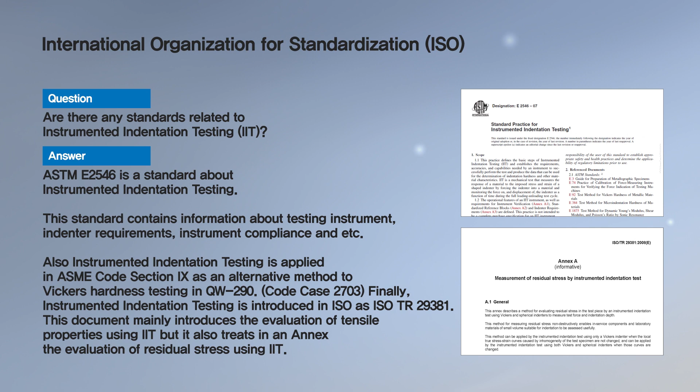With this video demonstration, we would like to give you a brief introduction about IIT and basic principles of equipment setup and operation by showing you some video clips.

Unlike conventional hardness test, IIT measures penetrated depth and applied load during loading and unloading operation, and it is the technology of getting a continuous curve of load and depth to get versatile properties precisely in a non-destructive method.

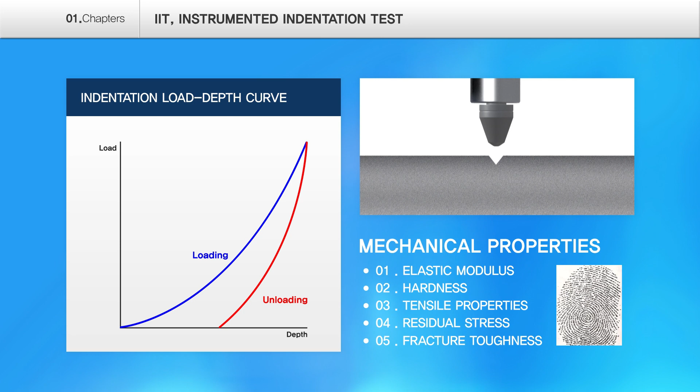Load depth curve from IIT represents the uniqueness of each material, like the fingerprint of a human. We can get diverse mechanical properties, such as hardness, strength, and toughness, from this LD curve in a simple, smart, and selective way.

Next is about the introduction of measurement for residual stress with IIT.

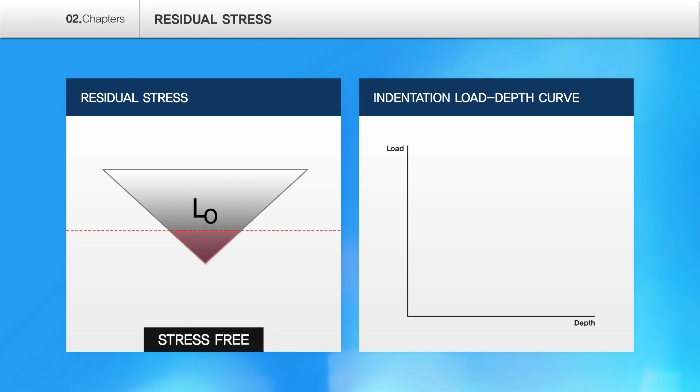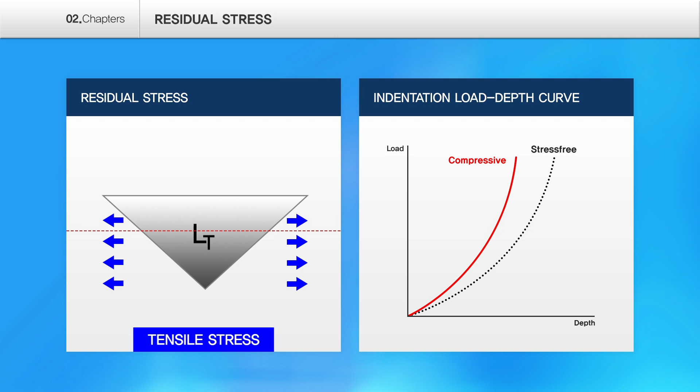The aforementioned load depth curve is different also based on the residual stress state of the specimen. If we assume that the curve being created now as a loading curve represents a stress-free state, and if the material is being indented in a condition of tensile stress state, being pulled to both sides, then the maximum indented depth would be increased. This means less load is needed to get the same indentation depth.

On the contrary, if the same material but under compressive stress from the sides is being indented, its maximum indented depth is reduced with the same load applied, which means higher load is needed to reach the same indentation depth.

The technology of IIT is to evaluate the value and direction of residual stress non-destructively from the load difference between stressed state and stress-free state that occurred during these processes. The next is about conversion of residual stress and load difference to tensor.

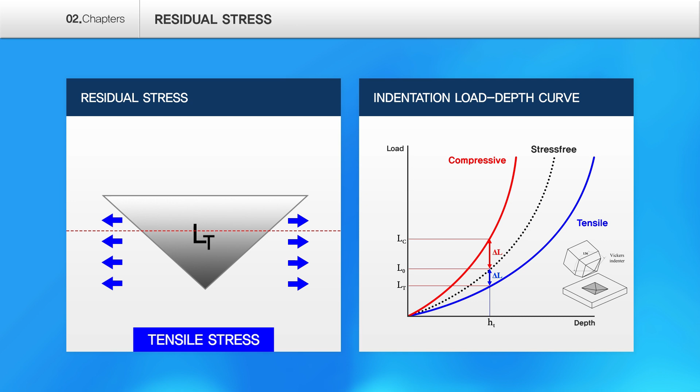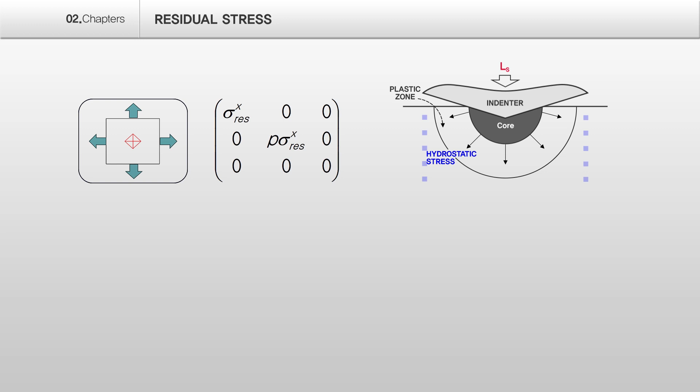When residual stress is distributed in x-y direction on the surface, if we put the ratio of these two stresses as P, it could be expressed as the following tensor.

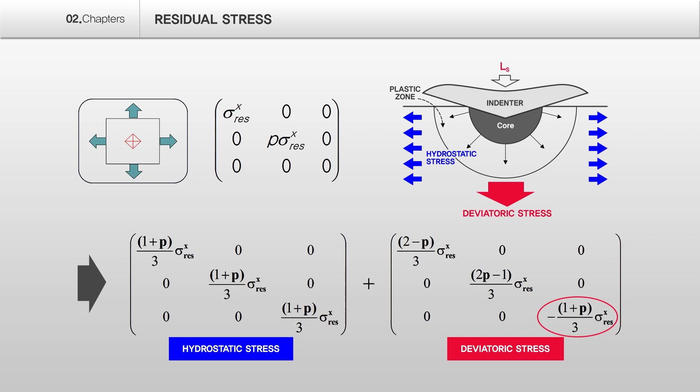It gets the stress element causing load difference from deviatoric stress, excluding hydrostatic stress, which affects only the elastic volume change. It can get the value of residual stress and direction because the converted stress value from the difference between this stress and load are the same.

Next, I would like to show you actual field application of AIS 3000 Compact based on this algorithm.

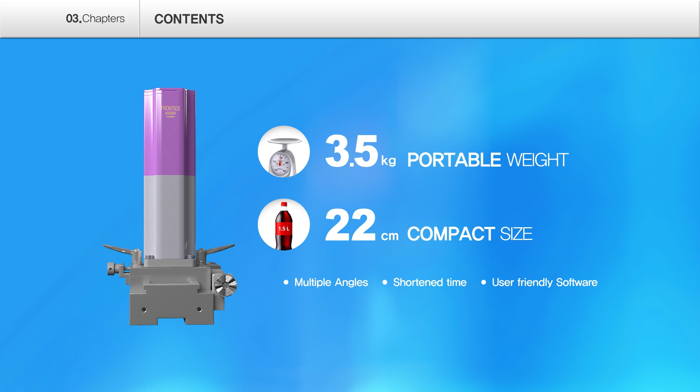AIS 3000 Compact equipment weighs 3.5 kilograms with 22 centimeters length. It is similar to the size of a 1.5-liter cola bottle, and it has different attachments to conduct testing on-site easily with application to tested objects.

In addition to the residual stress in basic software of AIS 3000 Compact, programs that calculate the yield strength, tensile strength, hardness, and fracture toughness are available, and it is being utilized in many different fields.

Now I would like to show you about the field application for the testing of the residual stress. The test procedure is like this.

First, we should choose the most suitable attachment according to the shape of the target object. In this video, it is using a fillet jig as attachment to the tested pipe.

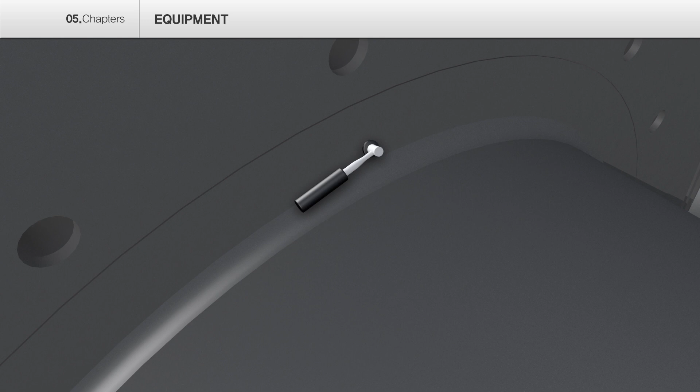At first, we prepare a stress-free state specimen. After checking the testing surface, fix the IIT instrument to the tested target with using proper attachment, and move the indenter down to implement the testing.

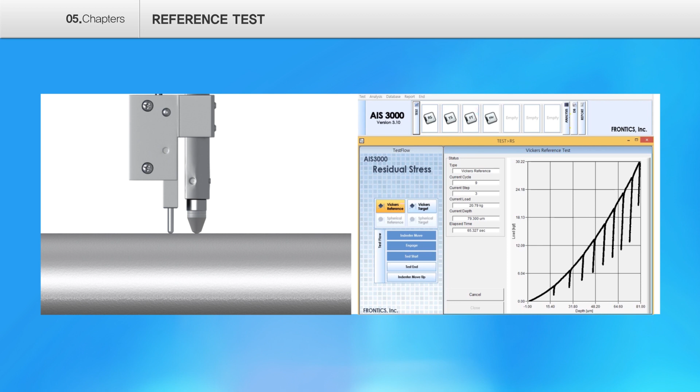This is called the reference test, and tests are conducted with dedicated software. You can see the view that the graph is being plotted from the software.

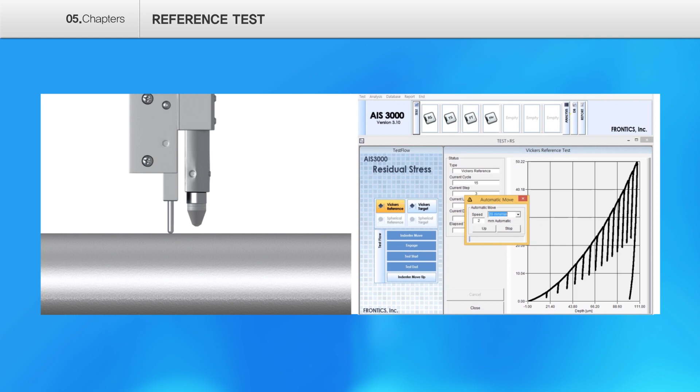Next, prepare the specimens of stressed state. This is called the target test. The test is conducted in the same way.

When it completed both reference test and target test, you can check these two indentation load depth curves on the screen. You can analyze values with a specialized software program.

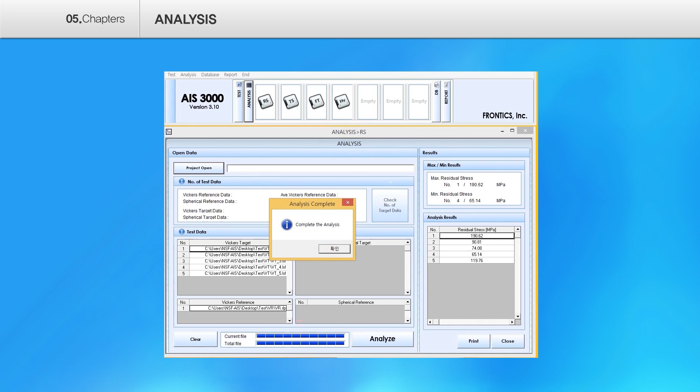The values will be described in MPa unit. The plus refers to the tensile residual stress, and minus means the compressive residual stress.

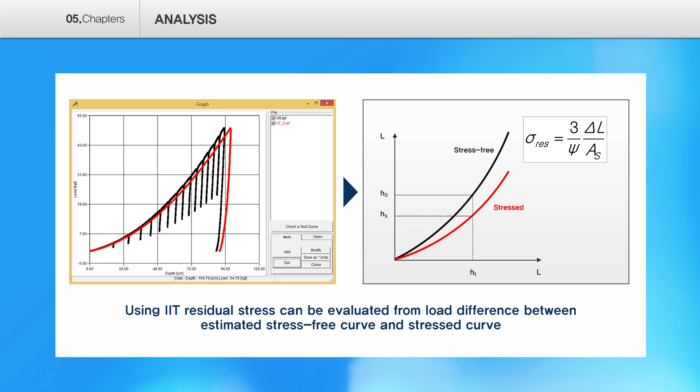You can test many different shapes of object with proper application of different attachments.

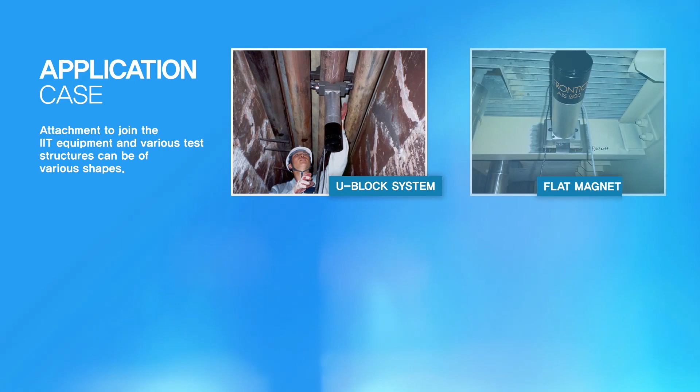The first testing case is for the safety assessment on welding area.

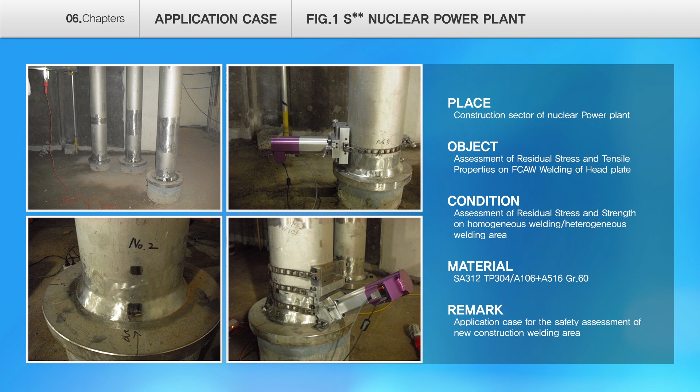The second testing is for verification of post-heat treatment on SG water piping.

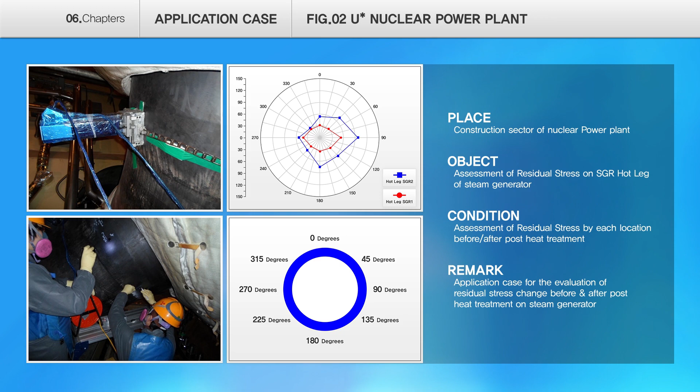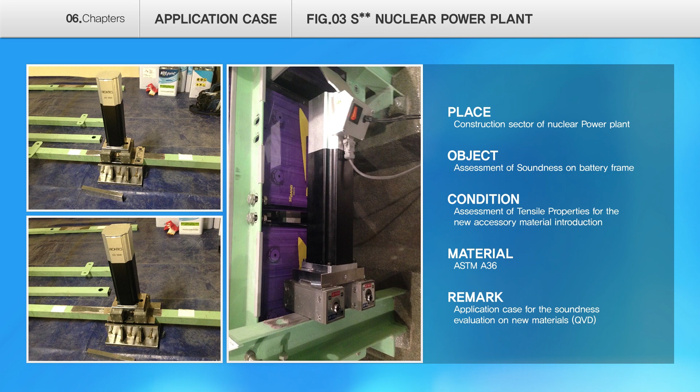The third is the application case for the inspection of incoming accessory material of structure.